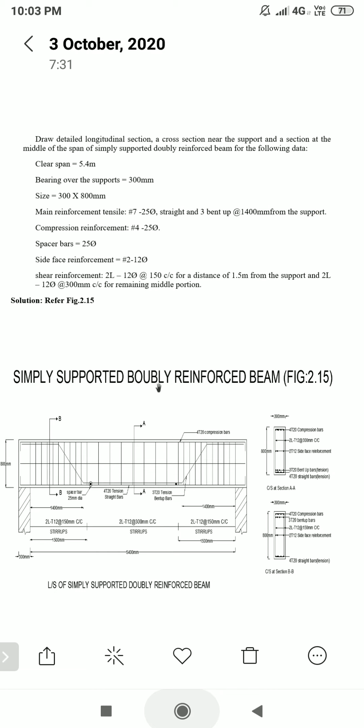Clear span is 5.4 meters, bearing over the supports is 300 mm, cross sectional size B into D is 300 by 800. Main reinforcement: 7 numbers of 25 mm dia straight bars, 3 bent up at 1400 mm from the support. Compression reinforcement: 4 numbers of 25 mm dia bars, spacer bar 25 mm dia, side face reinforcement 2 numbers of 12 mm dia. Shear reinforcement: 2 legged 12 mm dia at 150 mm center to center for a distance of 1.5 meter from the support, and 2 legged 12 mm dia at 300 mm center to center for the remaining middle portion.

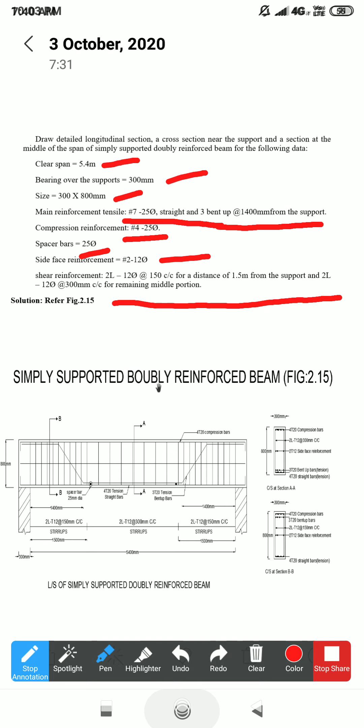First, it is necessary to draw everything that has already been given. We have to understand the drawings carefully.

So this is your support, 300 mm on both sides. The clear span is 5.4 meter. The depth here is 800 mm, so this is depth 800 mm.

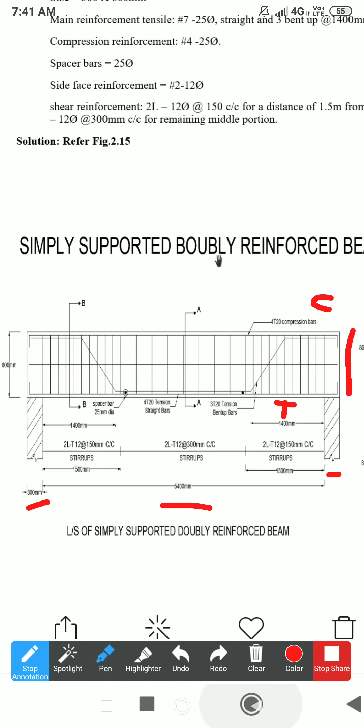This is your tension face, compression face remains same. At the bottom you have to give totally 7 numbers of bars. Out of 7, 4 numbers are straight and 3 numbers of bars are bent up, specified at a distance of 1.4 meter from the support. After bending upwards at an angle of 45 degrees, you extend it till the support at the compression face.

Since the reinforcement at the support section and the midspan section varies, we have considered two different cross sections. At the midspan, reinforcement will be different.

At the support section reinforcement will be different. When it comes to shear reinforcement, notice that at the supports for a distance of 1.5 meter, the spacing of stirrups is very close, 150 mm center to center. Whenever nearing the midspan, the spacing has been increased to 300 mm center to center.

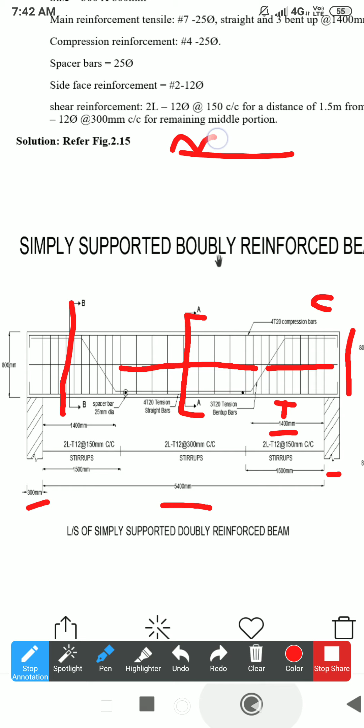I have already told you, if you take the simply supported beam carrying UDL and draw the shear force diagram for this, the shear force will be maximum at the support, WL by 2. Here also it will be WL by 2.

That is why you have to give very close spacing, since the shear force is maximum at the support. Whenever nearing the midspan, here it is 0, so the spacing is greater here.

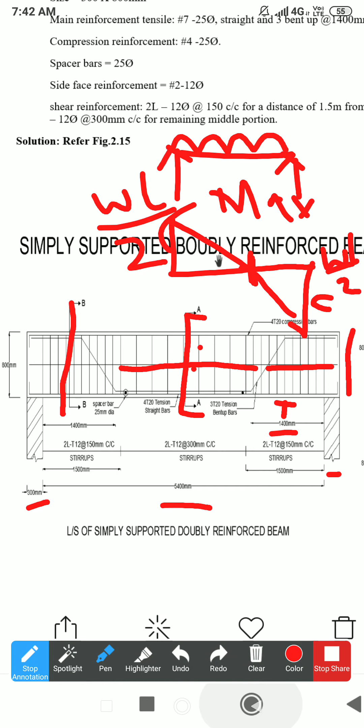Yeah, this is about the longitudinal section. Same thing you have to draw for the cross section also. There are two cross sections, one at the midspan and one at the support section.

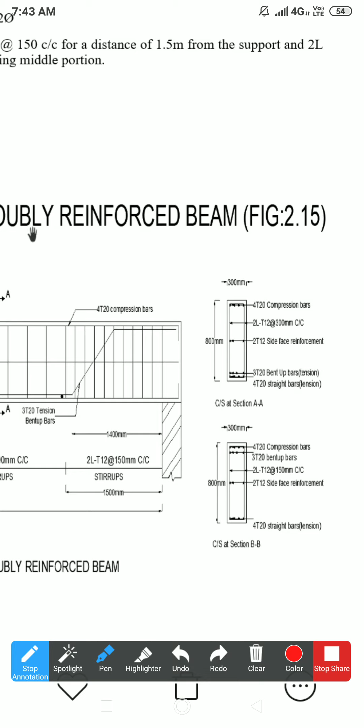This is cross section AA, at the midspan. This is cross section BB at the support section. In addition to the compression face and tension face, there is even side face reinforcement, this is your side face reinforcement. Also there is a spacer bar.

I'll tell you what that spacer bar is. So this is your spacer bar, provided at both sides where there is a bent up bar, where there are layers of reinforcement. Now I will draw one 3D drawing and it will be clear for all of you.

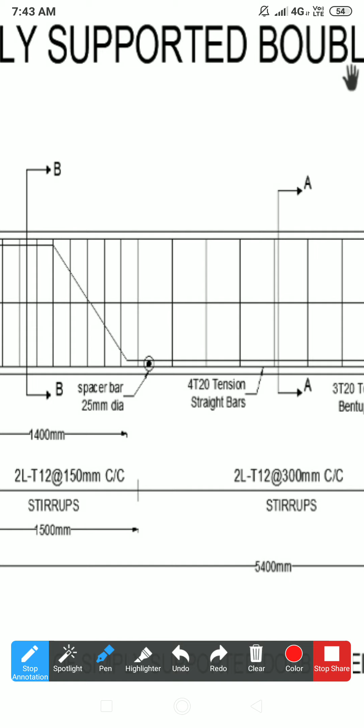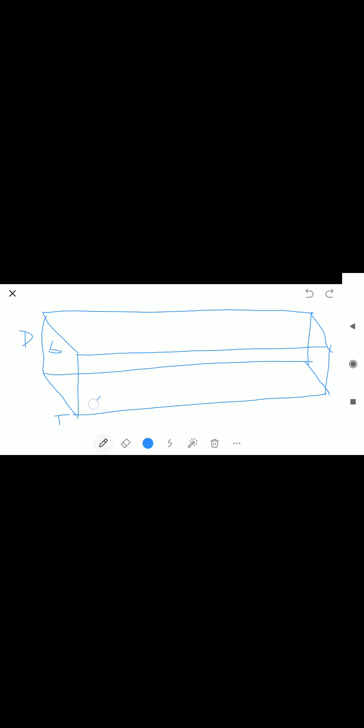So all the basic things you are aware of now. Bottom face, this is your width and this is your depth. So this is your tension face, and this is your compression face. All this you are aware of.

First we shall start drawing the reinforcement. I'll take the red color bar.

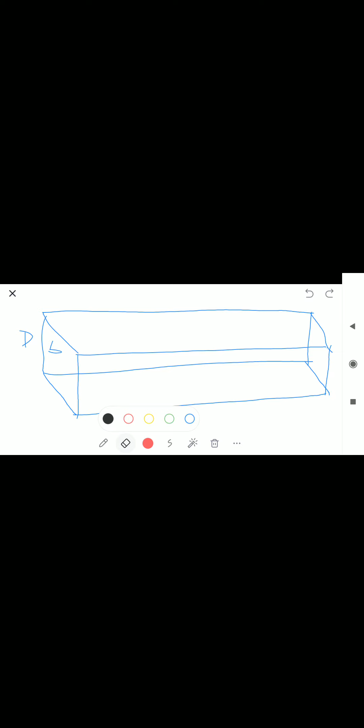First we shall draw the compression reinforcement. In compression, there are totally four number of bars. So we shall draw the four number of bars: bar 1, bar 2, bar 3, bar 4. So it is four number of bars.

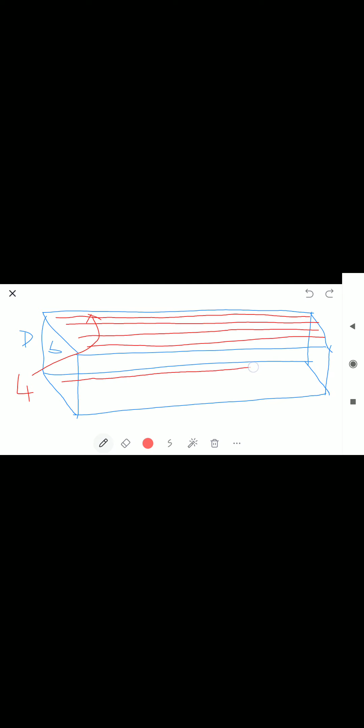Now let us come to the tension side. In the compression there were four number of bars, but in tension face, we have to draw totally seven number of bars. Out of that seven, we shall draw the first four bars in the first layer. Let me draw layer 1: 1, 2, 3, 4. So this is also tension reinforcement, four number of bars.

The additional three bars you have to bend. But before that, we shall give a spacer bar, in order to give the proper spacing between the first layer and the second layer. It is necessary for us to give the spacer bar. So this is your spacer bar, normally provided in the transverse direction.

Over this spacer bar, they have given the dia as 25 dia. You have to give a spacer bar because there are two layers and more number of bars here. At the corners, at the ends of the beams, you can connect it with the stirrups. When there are more number of bars, it is necessary for us to give the spacer bar.

I have to draw three bars here. For those three bars, you have to measure a distance of 1.4 meters from the support, on both sides. After measuring 1.4, from here you have to draw bar 1, bar 2, bar 3.

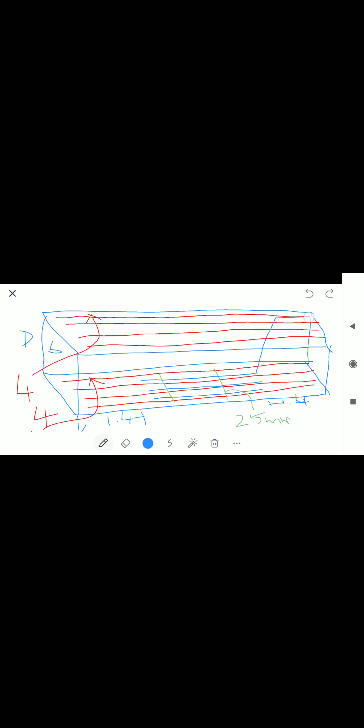You have to crank it, that is, bend it at an angle of 45 degrees, extend it towards the compression face, and extend it to the support like this. Bend it at 45 degrees and extend it till the compression face, till the support. So this is your three-dimensional drawing.

This is your spacer bar, shown in green color. Blue color is nothing but your bent up bar. Red color bar is nothing but your straight bar.

Why this bent up concept? The simple concept is: for flexural reinforcement, if you give the reinforcement exclusively for bending or flexural members, so much number of bars is not necessary. Wherever the steel is necessary - tension will be greater at the midspan, not at the supports, whereas shear is greater at the support. Simply if you extend all this till the support, this steel will not play any role in resisting the tension. If you just extend this till the end of the beam at the tension face, it will not have any role to resist.

Instead of that, you can go for the bent up bar, because only at the middle span will the tension and bending stresses be greater, and at the support the shear will be greater. So here you can accommodate for both the shear as well as the flexure. That is one advantage of the bent up bar.

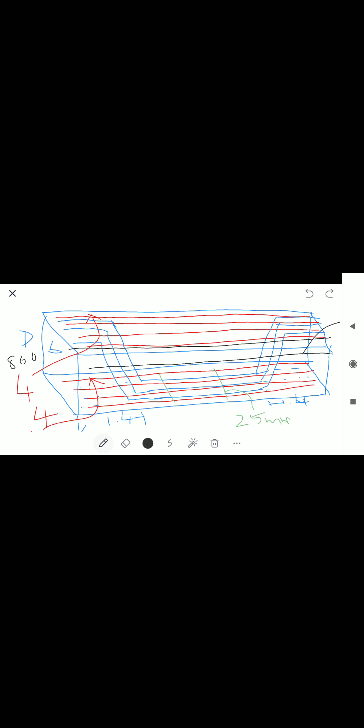Next I will draw the cross section. The cross section is taken at two points: one at the support condition, and one at the midspan.

Now I will draw it for the support condition. As usual, width, depth, everything has to be represented. At the support condition, compression reinforcement is 4 numbers as usual, and tension reinforcement has 7.

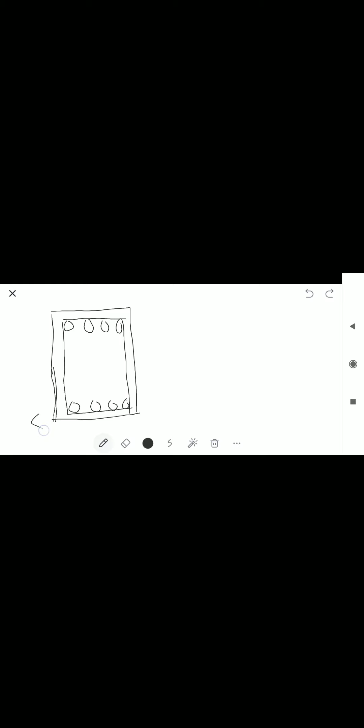First I will draw this at the support condition. This is at the support. At the support condition, see what has happened in the longitudinal section. As usual, in the two dimensional drawing we represent it like this, a single bar only. This is your support, so I am drawing the section here, and this is your midspan.

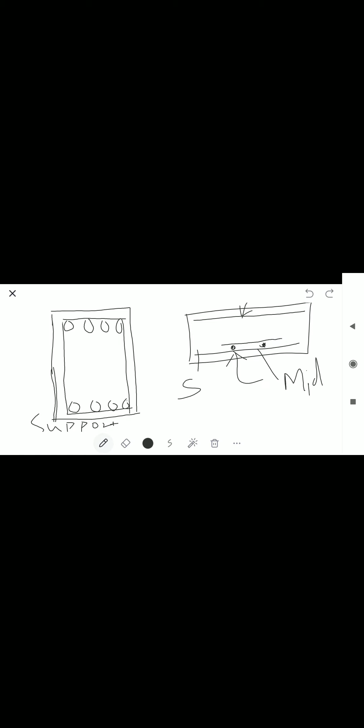There is a spacer bar, whatever bar I have written, observed like this. A spacer bar is seen like a small dot in the two dimensional structure. Normally the spacer bar is provided in the transverse direction. Above this spacer bar you provide the next layer of reinforcement, starting only after 1.4 meters, then bending it, extending it, and bending it again.

So this is the cross section we are drawing. Here as usual you will see 4 bars, so that is why I have written 4 bars. Then this one you will see as 4 numbers. Next, at the support you will also see 3 number of bars, which you have to represent. In addition to that there is a side reinforcement, which you also have to notice. This is about the cross section of the support.

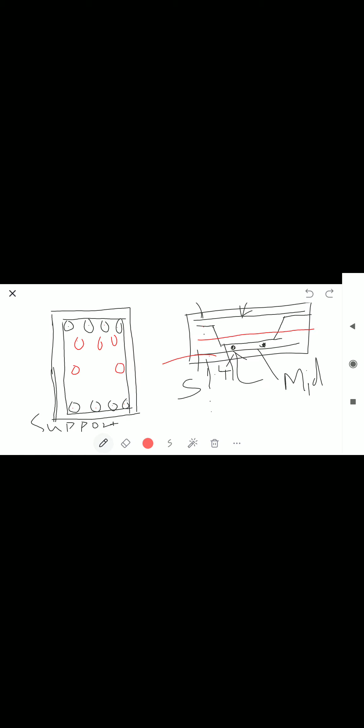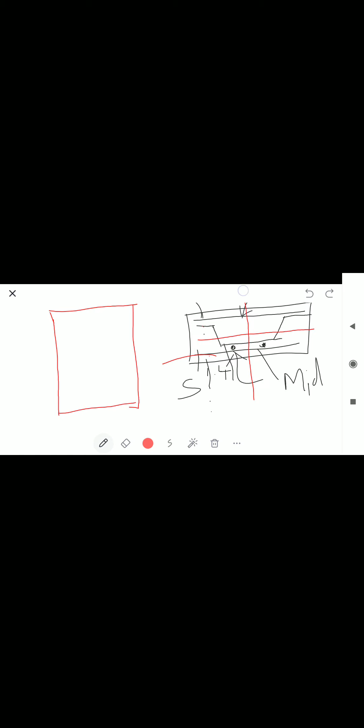One more thing, you have to draw even the cross section at the midspan also. So I will draw the cross section at the midspan. Now taking this section here, this is your midspan. In the midspan section, bottom as usual you will draw, there will be stirrups.

1, 2, 3, 4 you have to draw; this is your tension reinforcement, and at the bottom also you have to draw the compression. Top also you have to draw 4 number of compression, and here there is a spacer, this side reinforcement, side face reinforcement. Next, at the bottom, 3 number of bars you have to specify. This is the bent up section, and there is a spacer bar for all this, which you can also represent.

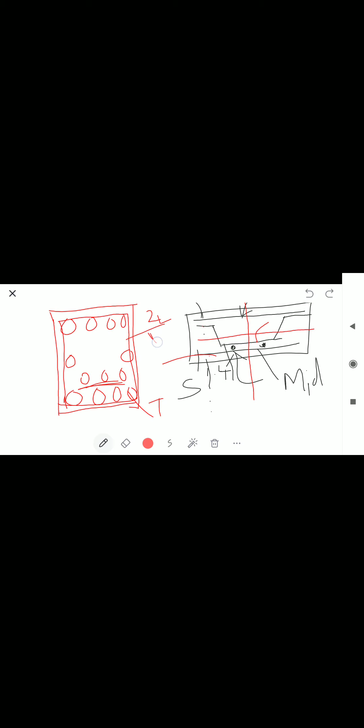And labeling you have to do. This is your two-legged vertical stirrups, which you have to draw very carefully in the two-dimensional drawing. So this is your tension reinforcement, compression reinforcement 4 number first layer, compression also 4 numbers.

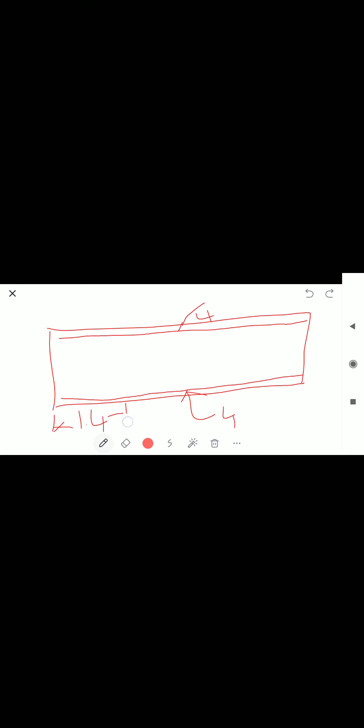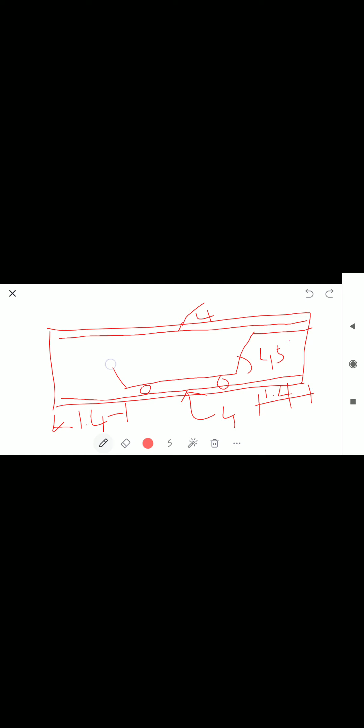Then after a distance of 1.4 meter from both sides, you will be having a spacer bar. This is normally given in the transverse direction of the beam. Then you are bending it up at a 45-degree angle and extending it till the support. So this is your 2D representation.

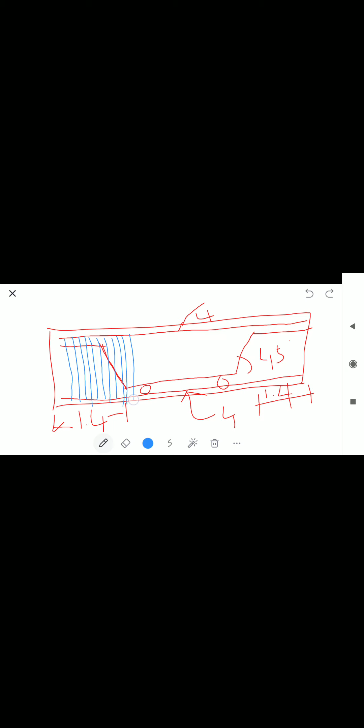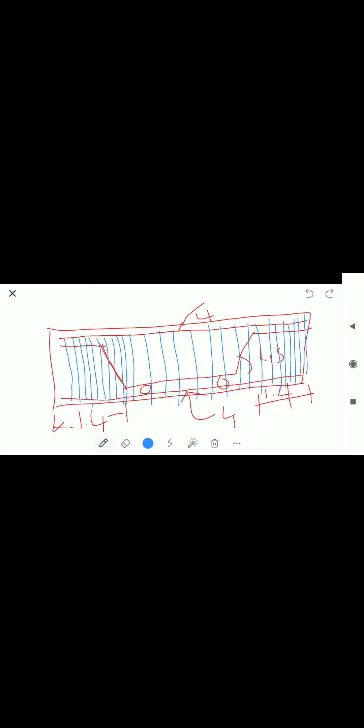After this, you have to give the stirrups. The stirrups will be much closer near the support. Whenever you are reaching near the support from midspan, the spacing will decrease as you move. The detailed specification is given in the data, which you can refer back to. This is how to draw the bent up detailing.